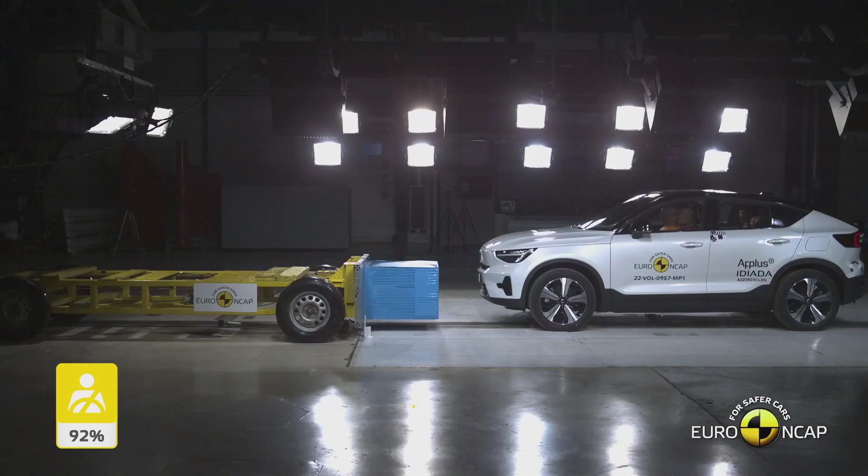Car accidents happen again and again. But when the body of the car absorbs the energy and redirects it, that is a good thing. It makes the passenger safer. Safety engineers have done a lot of work to ensure that vehicles can do this, and the results are worth looking at.

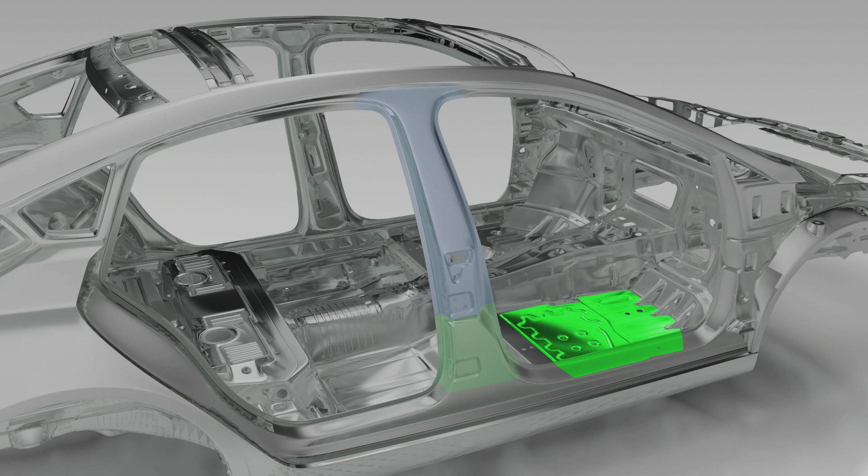Some components of the car's body have a high level of stiffness, and others are softer and designed to bend. Some even have both properties, stiff in the upper part, soft and flexible in the lower area. This allows them to absorb energy and provide optimum protection for the occupants.

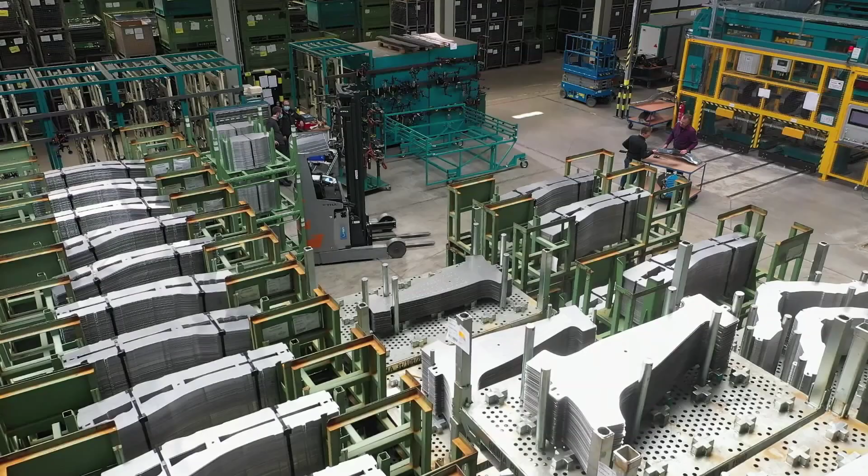Gedia, a company based in Attendorn in the Sauerland region of Western Germany, has developed a completely new production line to build such auto body components.

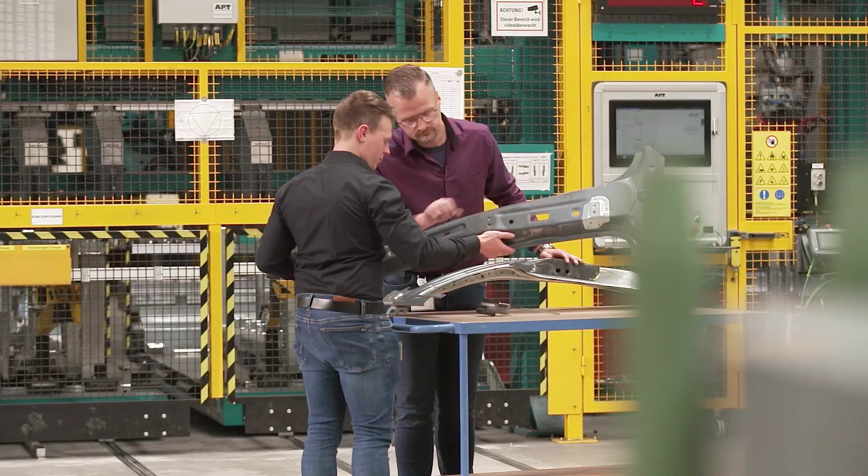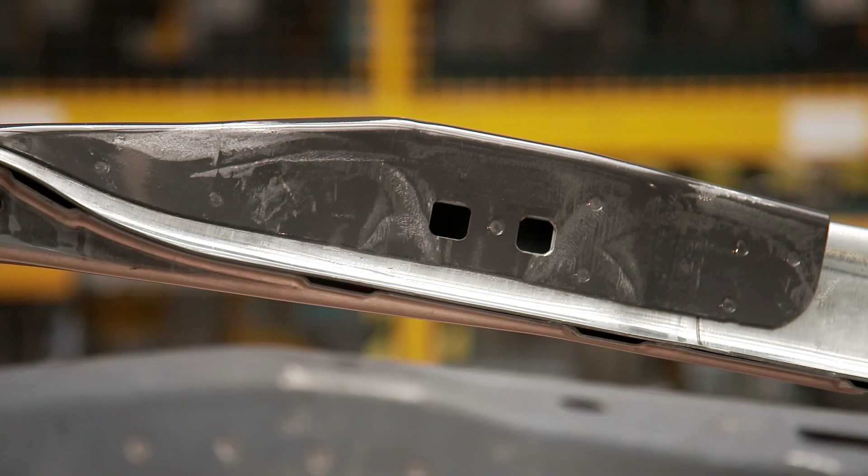In the past, parts that had both properties, stiffness and flexibility, consisted of two different pieces of sheet metal with different physical properties. Now a new process makes it possible for a component, like this so-called B-pillar, to be made from just one piece of sheet metal and still have both properties at the same time.

It's significantly lighter than auto body parts assembled from two pieces.

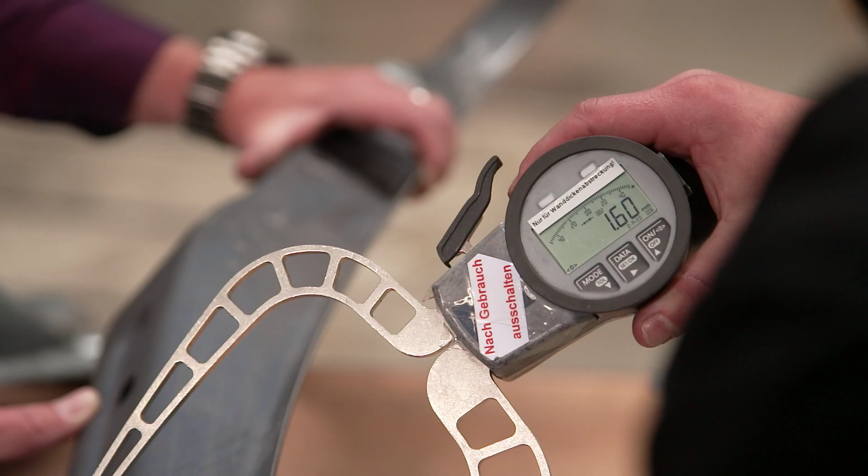With TemperBox technology, we're able to manufacture auto body components with multiple strengths and properties all in one piece, and we can do this in one step. This saves energy and material during production and also saves weight and material in the car.

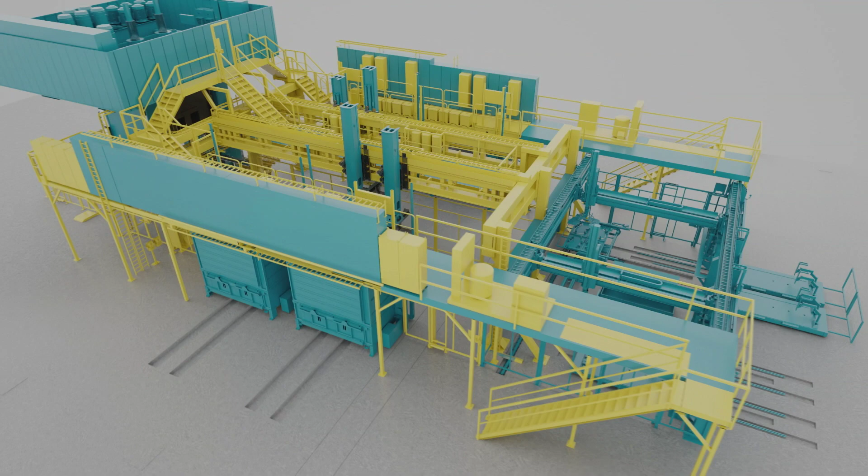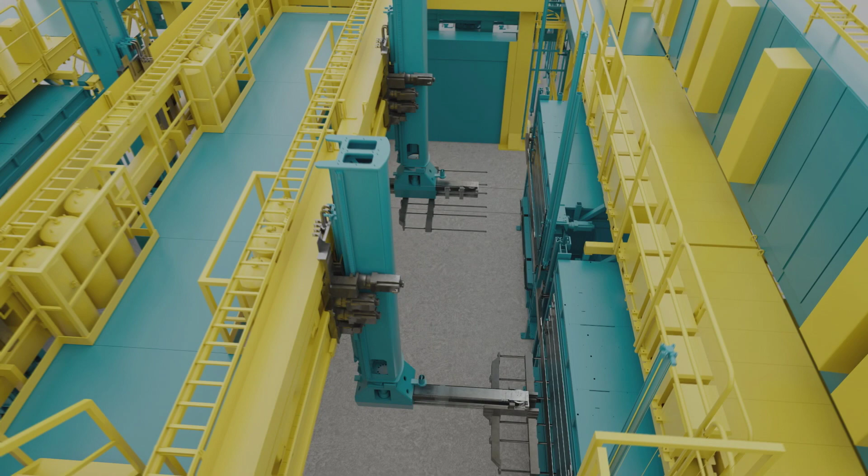This new manufacturing plant consists of two production lines. They can be fed with sheet metal independently of one another, and also at the same time if necessary. First, the sheet metal is heated in furnaces. Then it's molded in a large press.

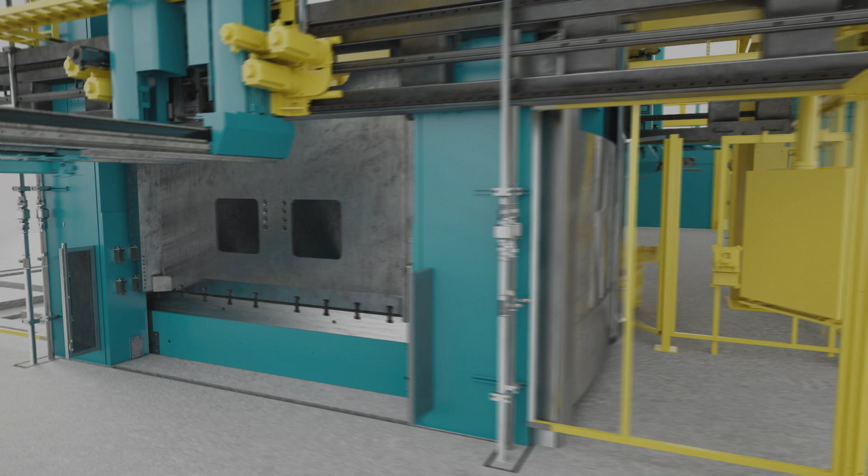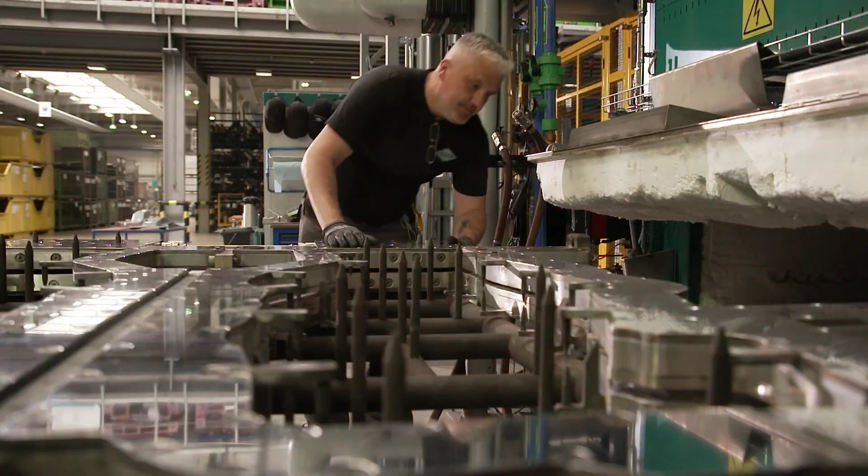In order to combine two physical properties in one piece, the new production line uses what's known as the TempoBox process. Different temperature zones in the furnace are necessary for this.

To create these zones, technicians slide a special template into the furnace. The template enables components to be cooled at certain points while they're still being heated in the oven. To do this, hoses with cooling water are connected to the templates.

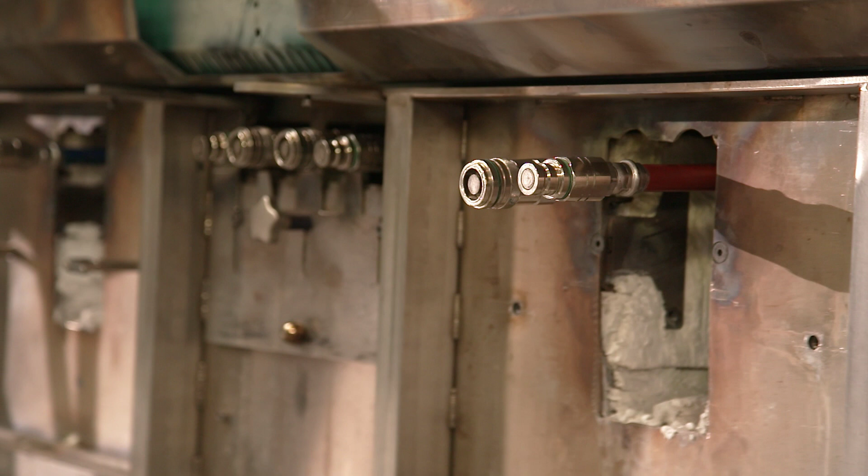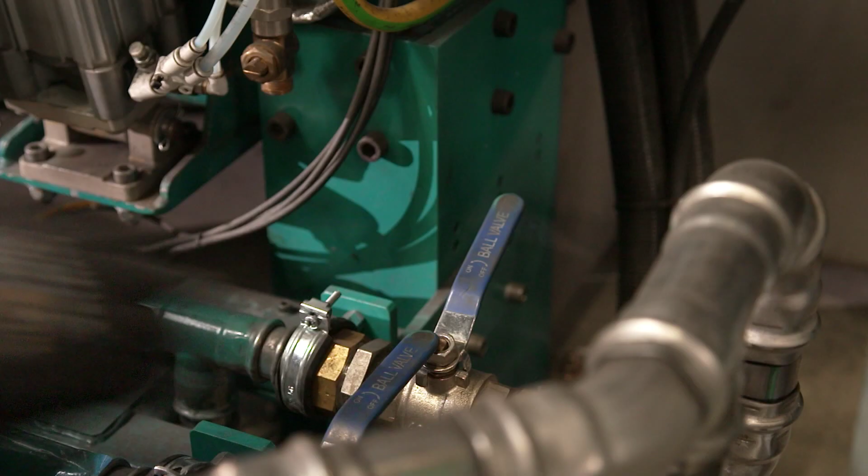The cooling water has a temperature of around 70 degrees Celsius. It flows through the templates while heating coils heat the components inside the furnace to over 900 degrees Celsius. This technology not only produces components that are important for vehicle safety, but also increases material and energy efficiency at the same time.

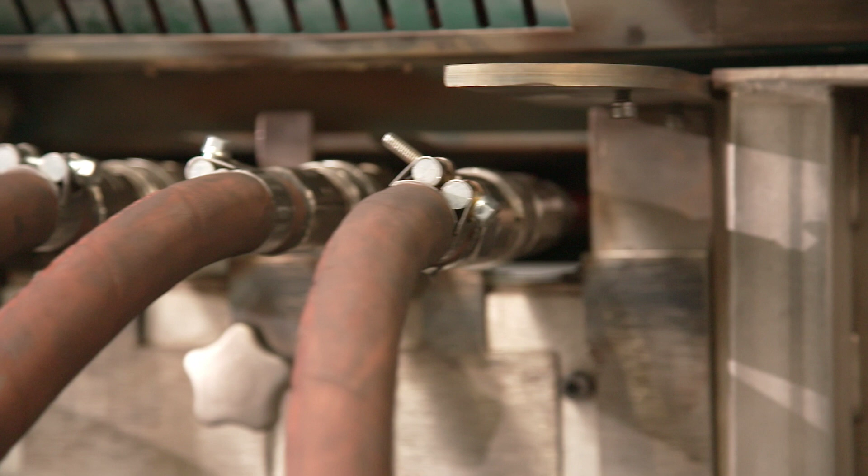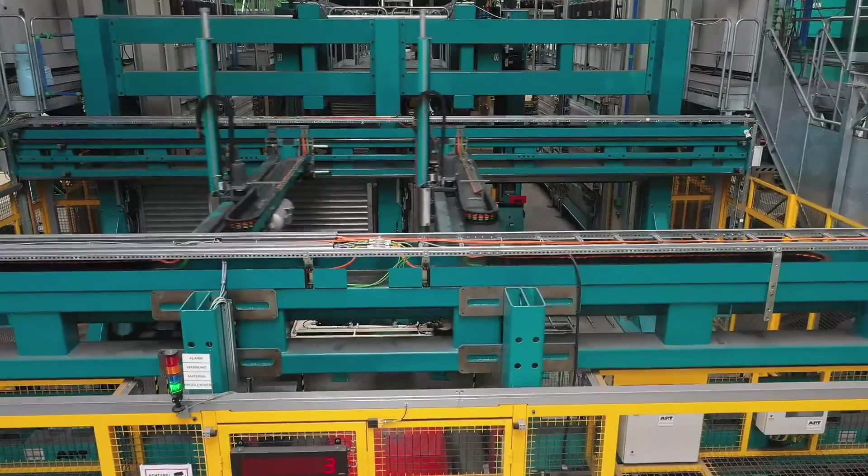At the start of production, the blanks are prepared. The sheet metal has already been cut to size for the body component and is placed in a special frame. This allows several parts to pass through the production process at the same time.

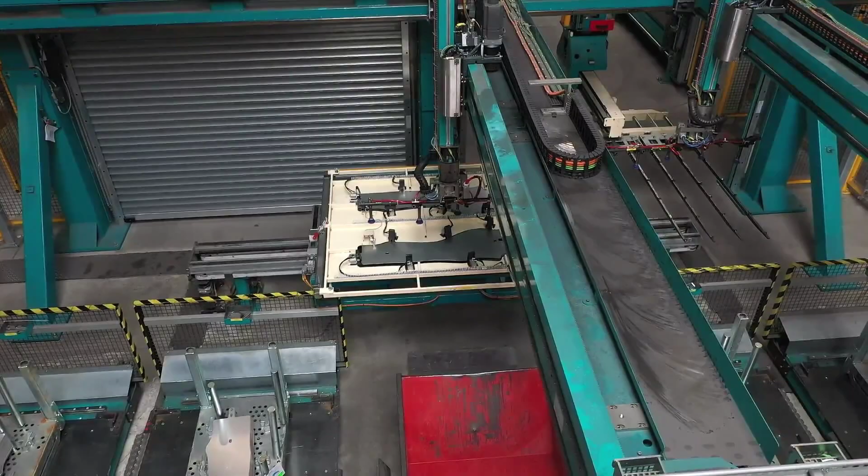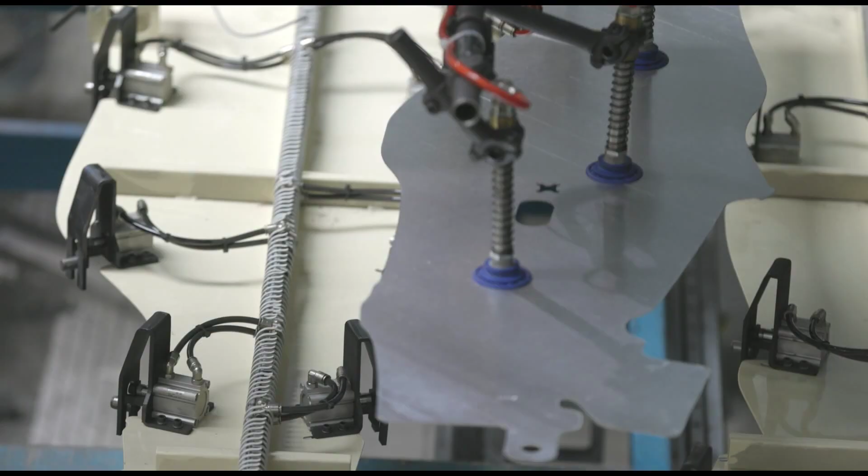Robots then push these frames with the sheet metal into the furnaces. The sheets initially remain in the upper furnaces for around 5 minutes. The furnaces are heated to around 930 degrees Celsius.

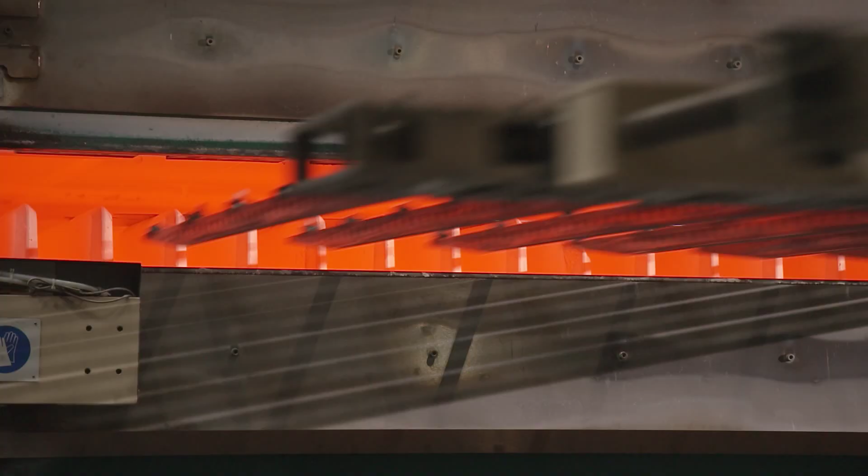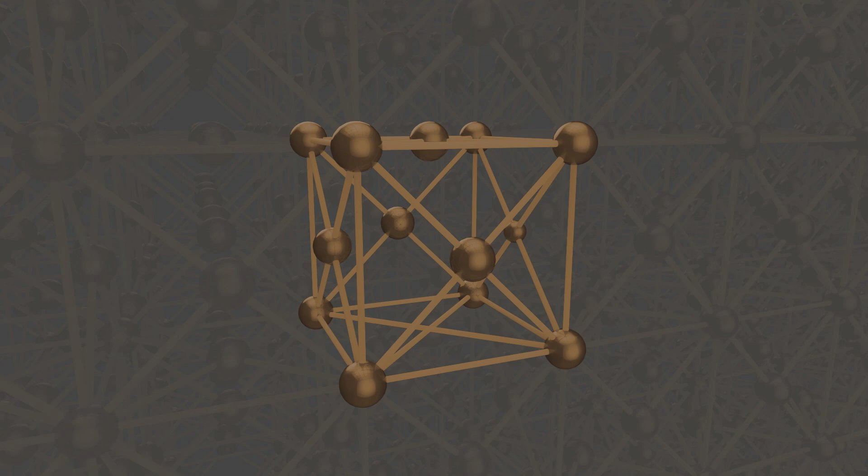The intense heat in the furnaces changes the physical properties of the sheet metal. The individual iron atoms are initially bonded together in a so-called ferrite structure, which has good formability. At 930 degrees Celsius, the atomic structure of the metal changes, and during this process, a body-centered cubic ferrite structure develops into a face-centered cubic austenite structure.

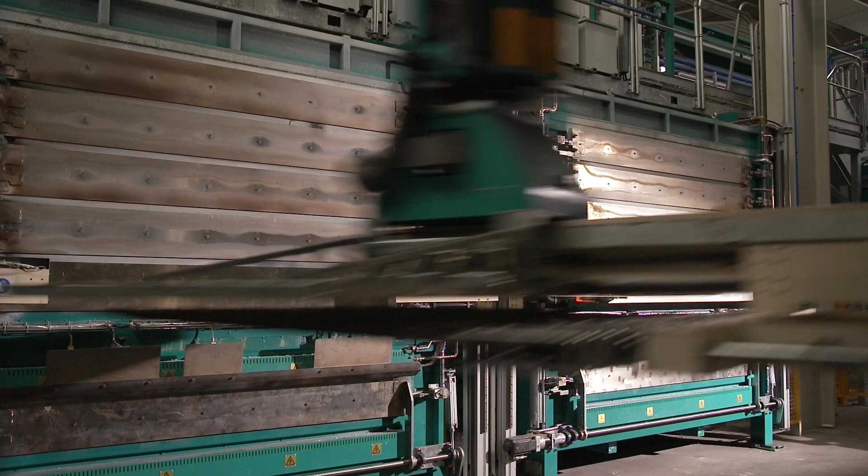The robot then transports the hot steel sheets down to the lower temper box. The templates are in this lower box. The sheet metal is placed between the two templates. The templates are cooled down with 70 degrees Celsius water.

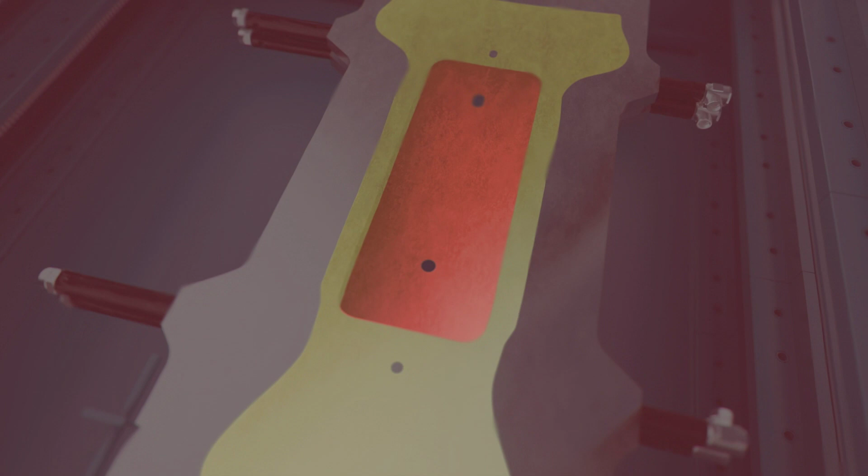In the area covered by the templates, the temperature of the sheet metal drops to around 450 degrees Celsius. As a result, the metal in this area adopts the softer ferrite structure. In the middle area, which is not cooled, the sheet continues to be heated at over 900 degrees Celsius and remains in the austenite structure.

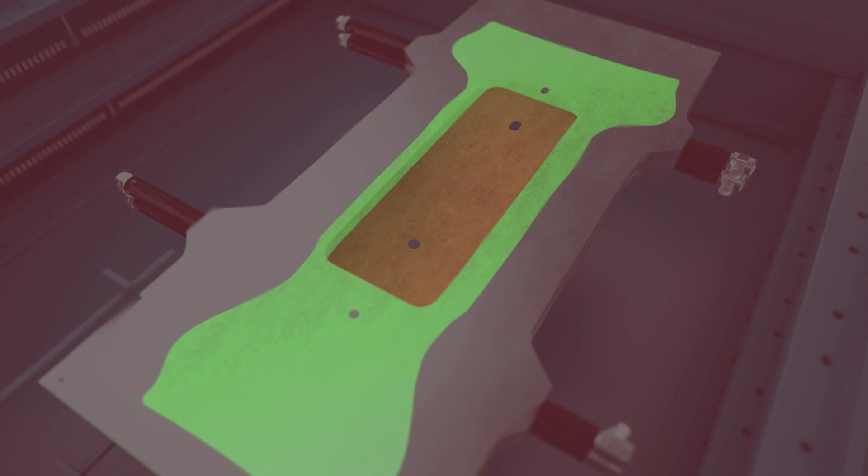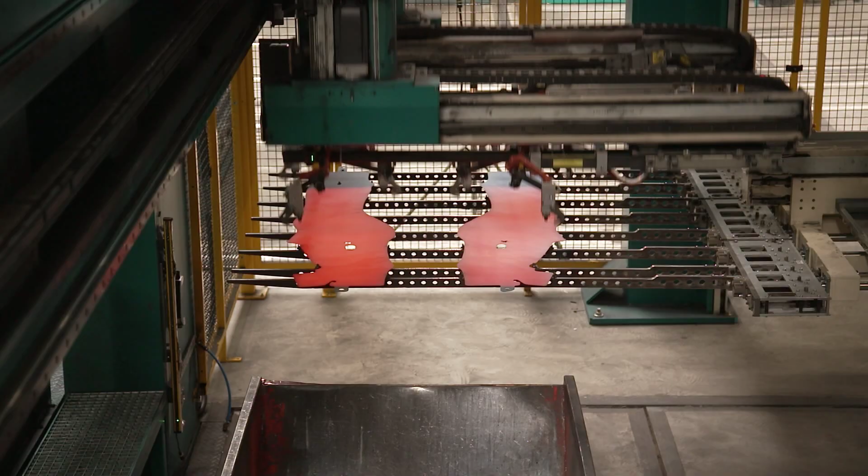The robot takes the piece out of the temper box and carries it to the press. At this moment, it has two different temperature zones with two different metal structures.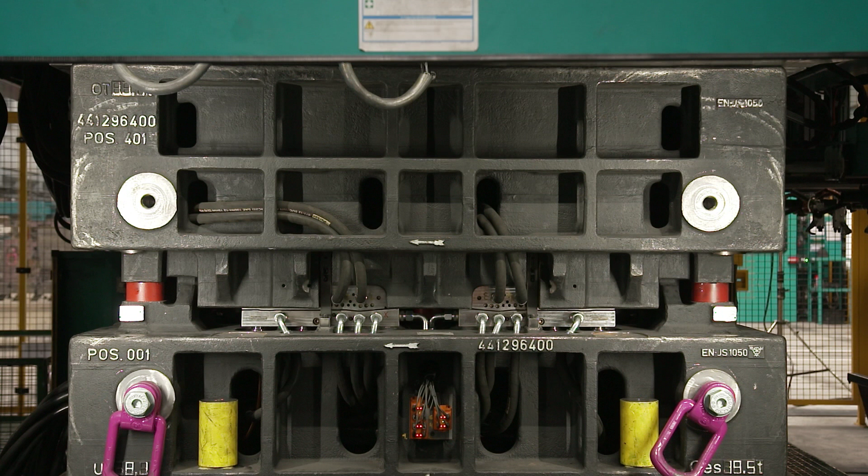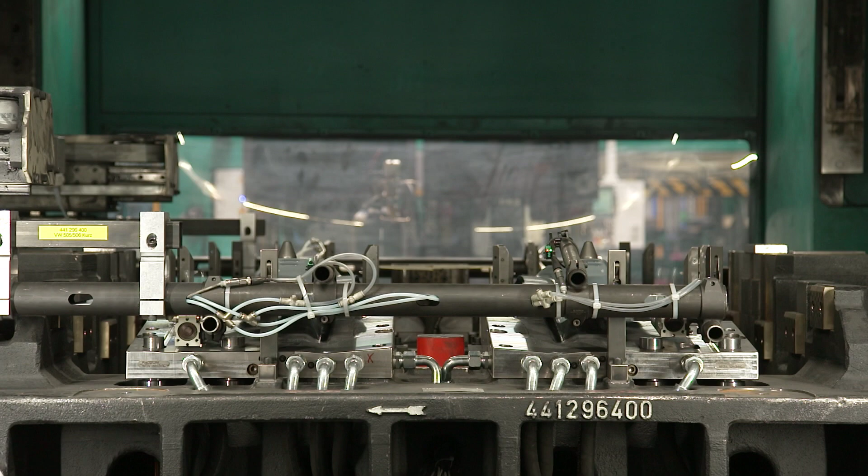The press operates at a pressure of up to 1,200 tons. During forming, water flows into the die. As a result, the hot metal is cooled to below 100 degrees Celsius in just a few seconds.

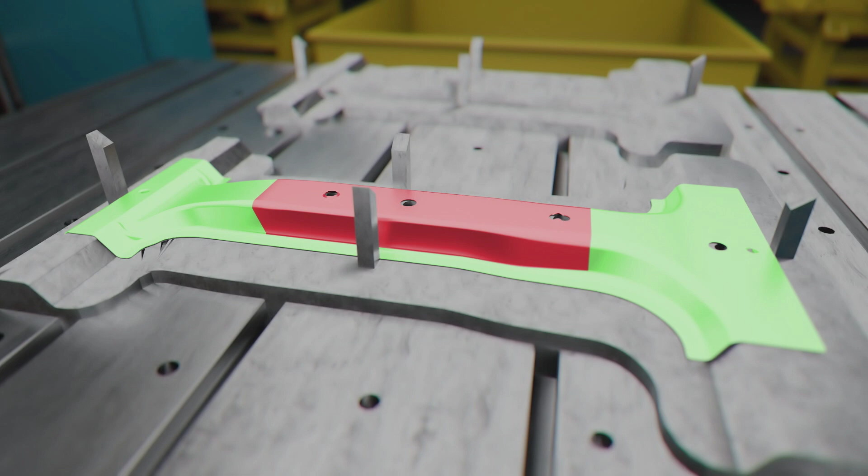In the hot zone of over 900 degrees Celsius, this rapid cooling creates another metal structure out of the austenite. The rapid cooling, called quenching, creates a slightly distorted structure, the so-called martensite. This is particularly strong.

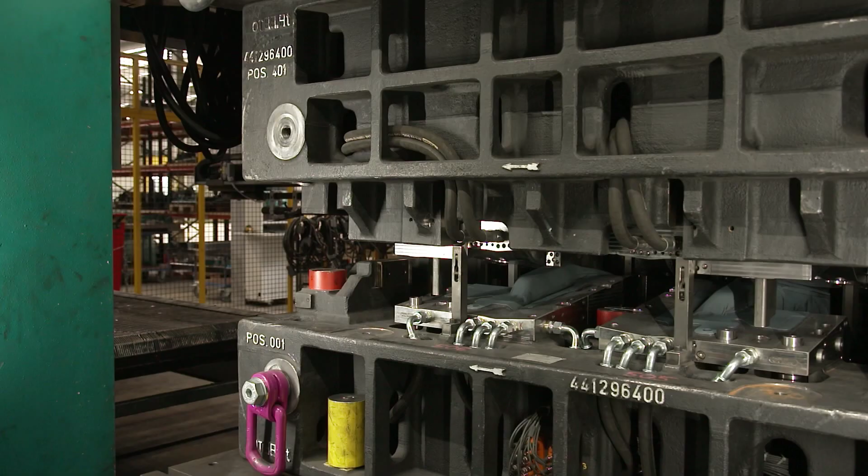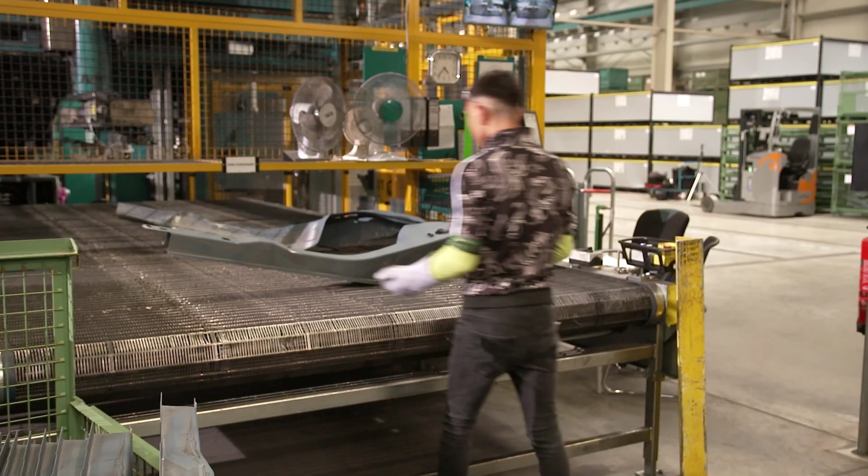At the edges of the metal sheet, however, there is still the malleable ferrite structure. The result is a component of a vehicle body that has two physical properties and is significantly lighter than if it had been made from two different metals.

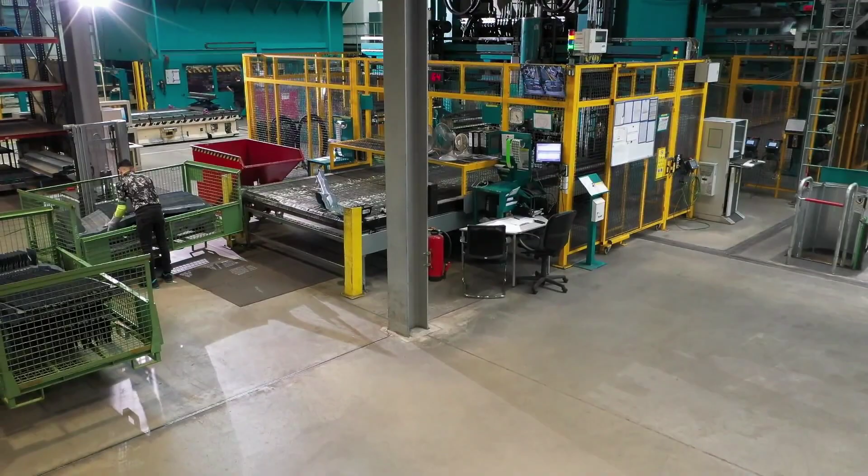At its site in Attendorn, the company uses this new technology to manufacture over 20 different components for the automotive industry. These have the physical properties required by safety engineers, yet were formed out of one piece of sheet metal. This saves large amounts of raw materials.

With TemperBox technology, we are able to save between 5 and 50% of the raw materials depending on the component. For us, this means we can save around 1,500 tons of steel raw material per year, and that amount will probably go up.

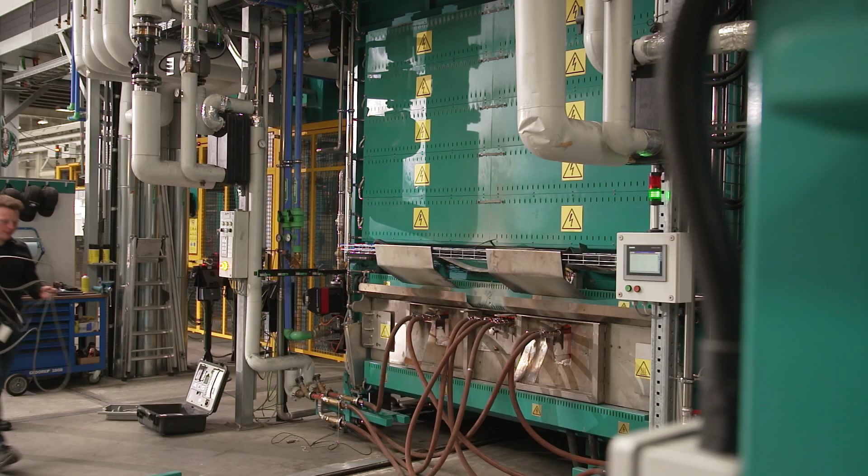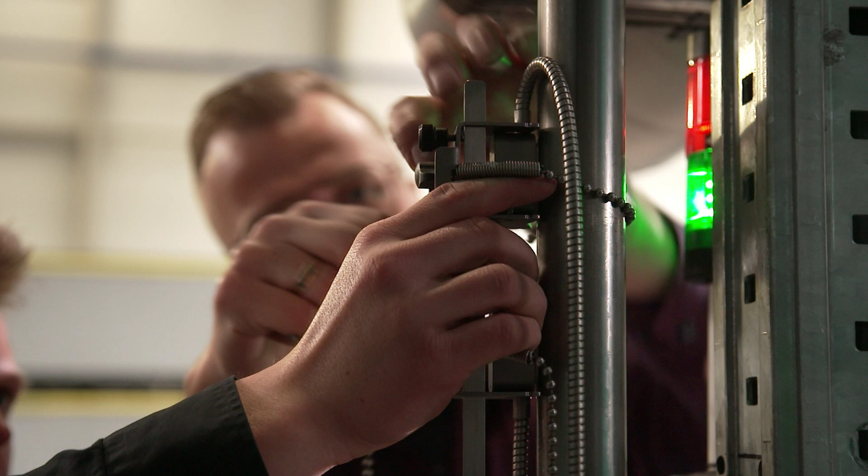The engineers continue to optimize the new technology. Their aim is to reduce the energy used for cooling as much as possible. One method is letting the cooling water flowing back from the template to cool down less.

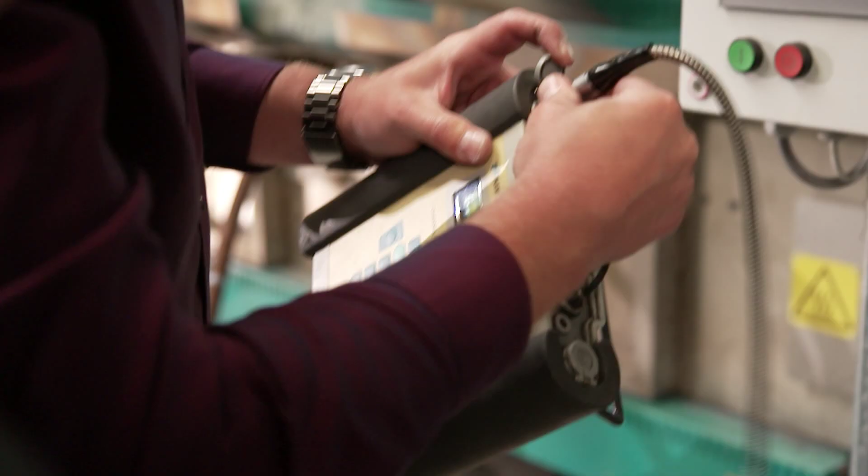The supply and return temperatures are monitored continuously during the process. However, the cooling temperature cannot be allowed to become too warm. Otherwise, the hard martensite structure will not form in the cooled zone. We reduce the energy input into the cooling water, yet ensure that the product quality remains the same.

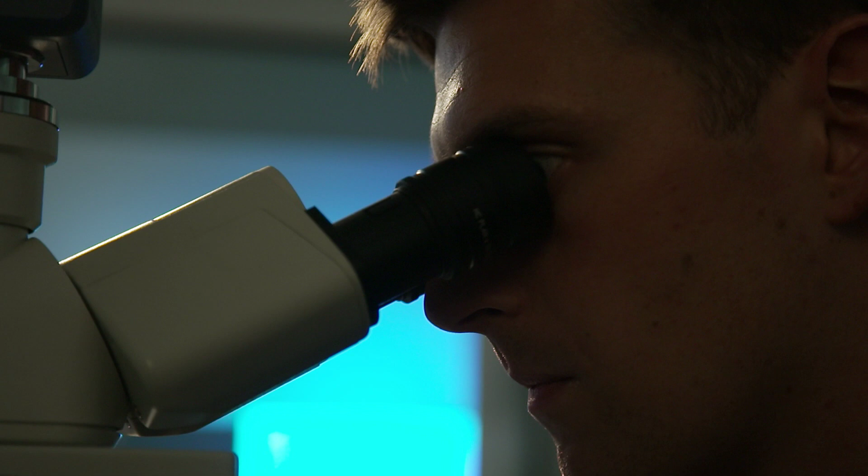Together, the TemperBox and the press can produce a large amount of different auto body components. Depending on which template is used, these can also be cooled in different zones, and this means that at different points, the parts can be either stiff or flexible.

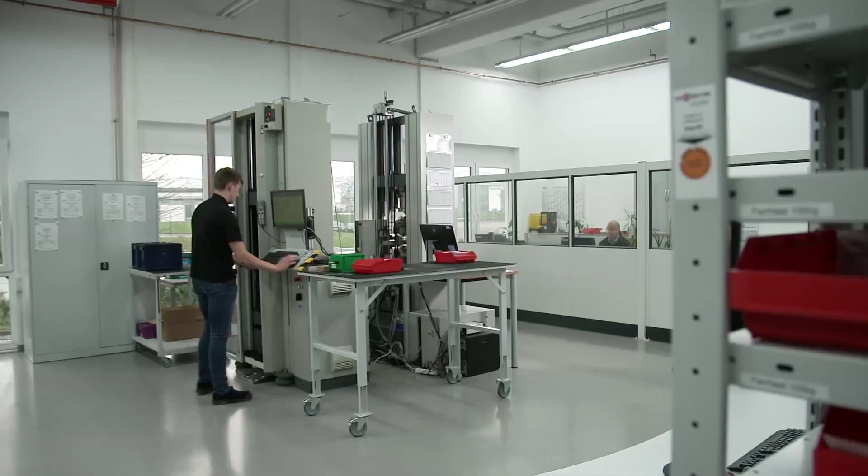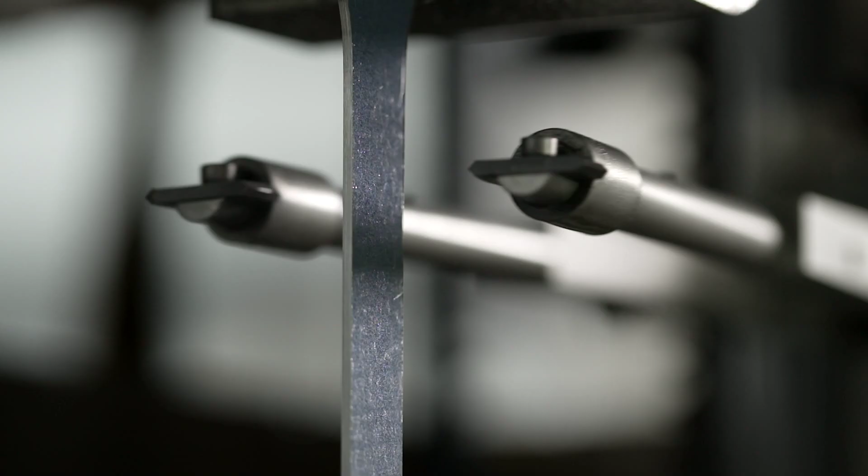The engineers examine samples of the finished body parts. They analyze the microstructures that developed. Then the engineers do tests to determine the flexibility and strength of the material. This helps them to ascertain whether they can further reduce the cooling energy or even the heat input in the individual furnaces, yet still produce the material with all of its desired properties.

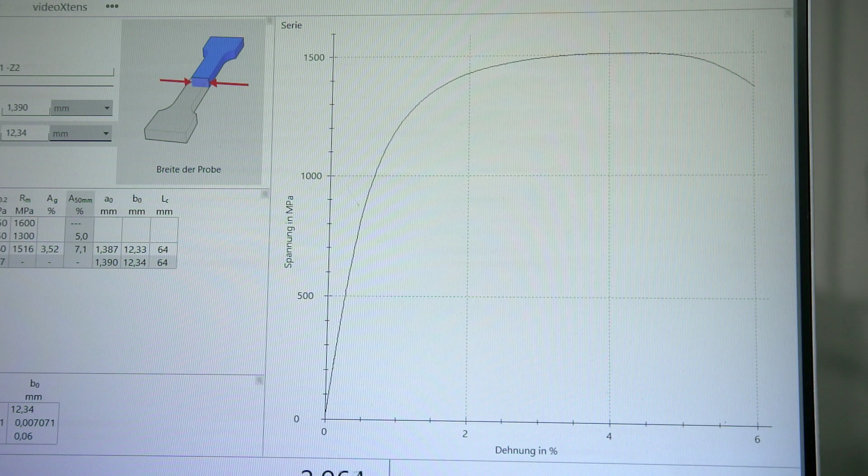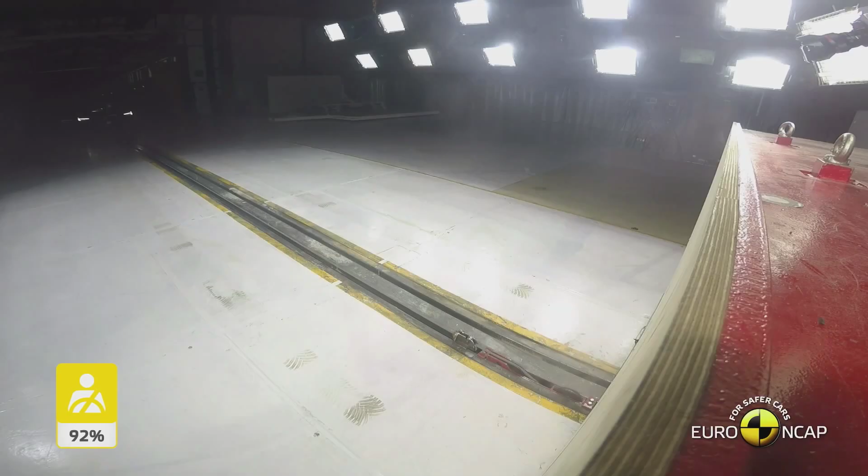Due to the new TemperBox process, safety engineers now have completely new design options for their work. New components are created that take safety to another level, and they do it with less energy and fewer materials.